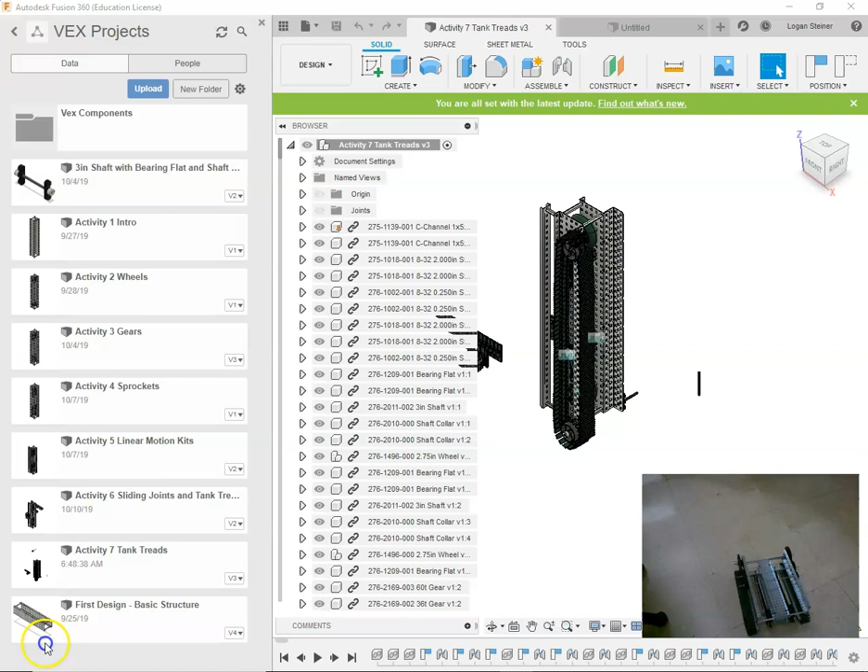Today we're going to actually be giving you your final project for the marking period. As you can see on the screen here, this is half of Activity 7, the tank treads, which we did everything in the VEX kits up to this point. Activity 7, there's 7 different activities. I taught you each a little bit of the components, so now you're ready to tackle your own project.

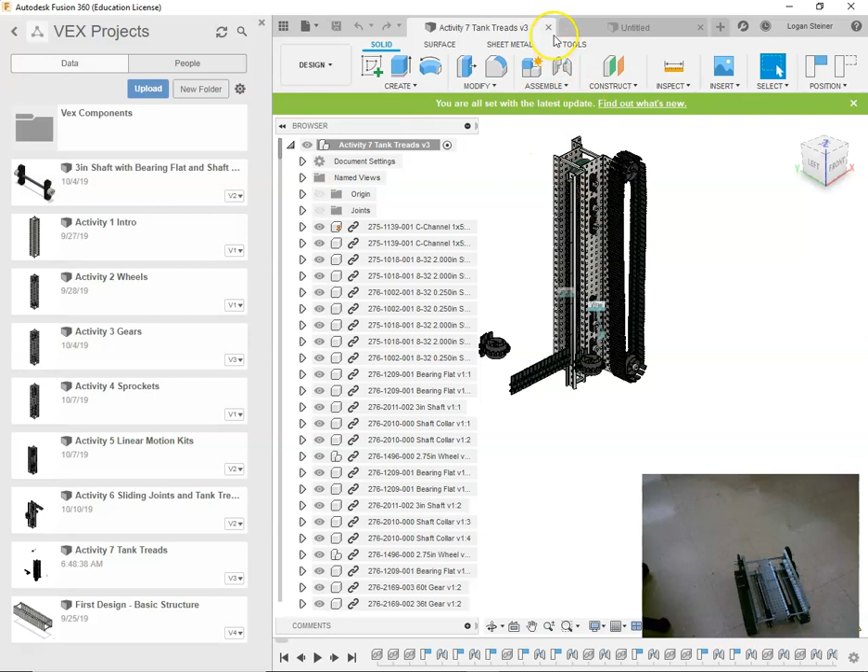Instead of me going through and giving you a video tutorial about it, I'm going to close out of my Activity 7, don't need it. Now I'm going to make sure I'm in my VEX projects folder in Fusion 360, next to my VEX components, not inside of my VEX components. I'm going to push save on my untitled document. I'm going to save this as VEX final project, just like this, in my VEX projects. I'm going to push save.

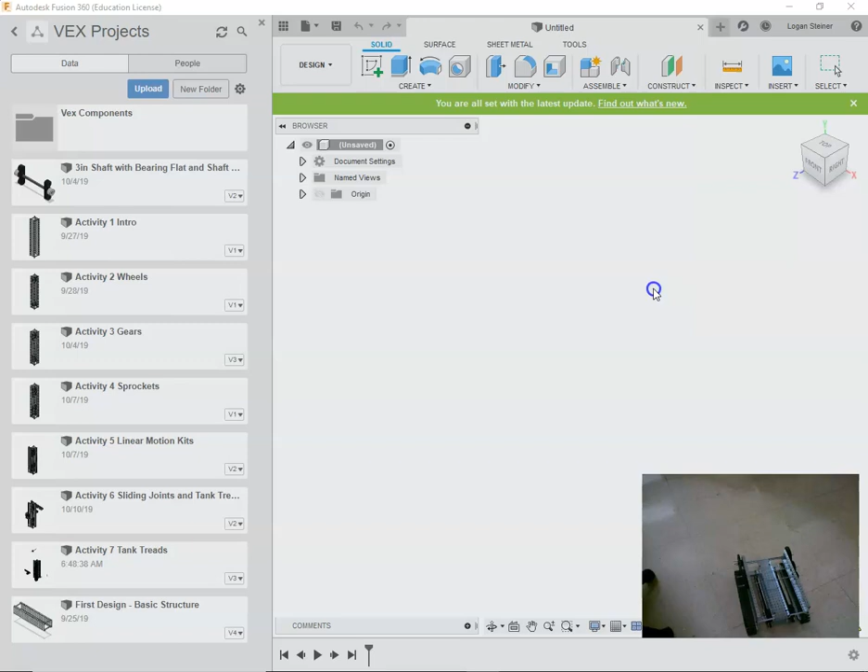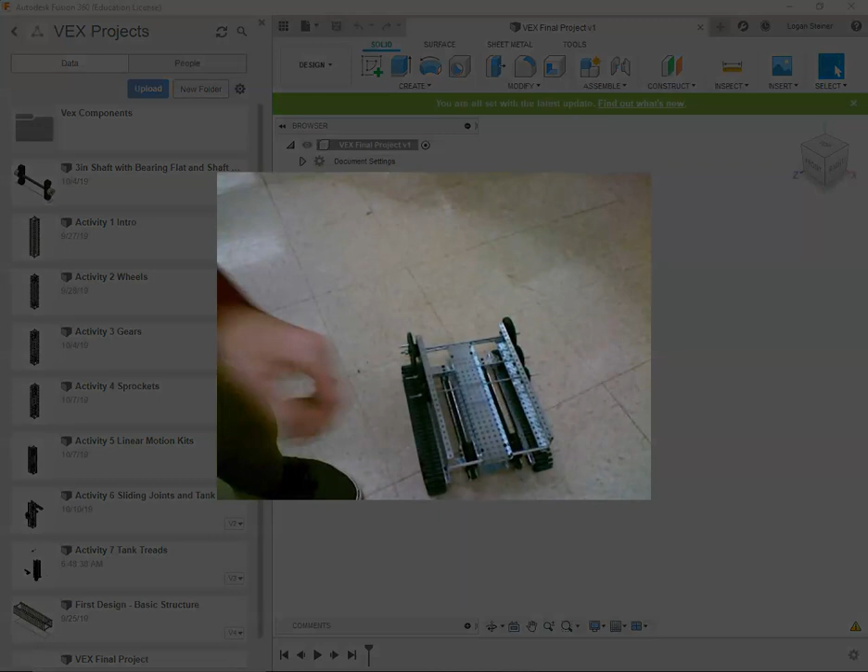Now you're going to be asking, what is this thing down here, what is this window? Well, that's me. Hello. And I'm going to show you guys your final project. So you get to build this beautiful piece of machinery on Fusion 360. I'm going to show you step by step what each thing is, and help you out with identifying parts and pieces.

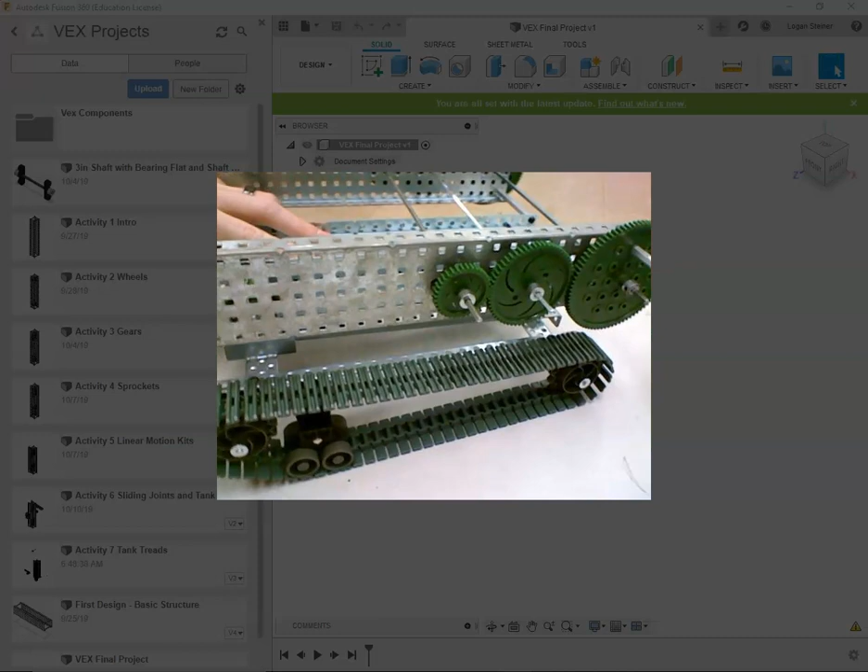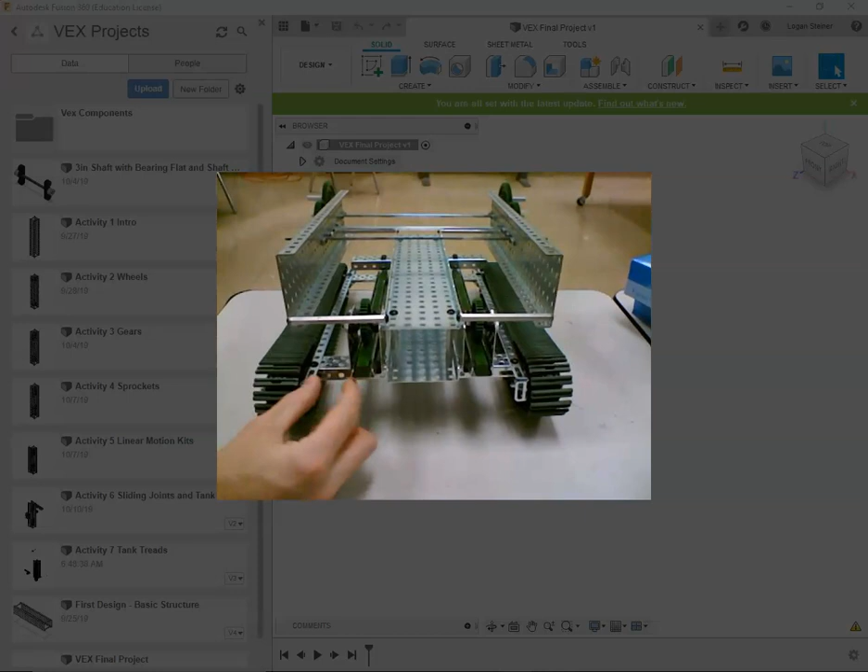As you can see, this vehicle is 100% symmetrical, except for the fact that these rails down here have 2 open spots over here when there's only 1 open spot over here. So it's a little slightly uneven. You got a bigger gap over here than over here, because it's not an even number of spaces. It was an odd number of spaces, so I couldn't quite find the middle point to screw these onto.

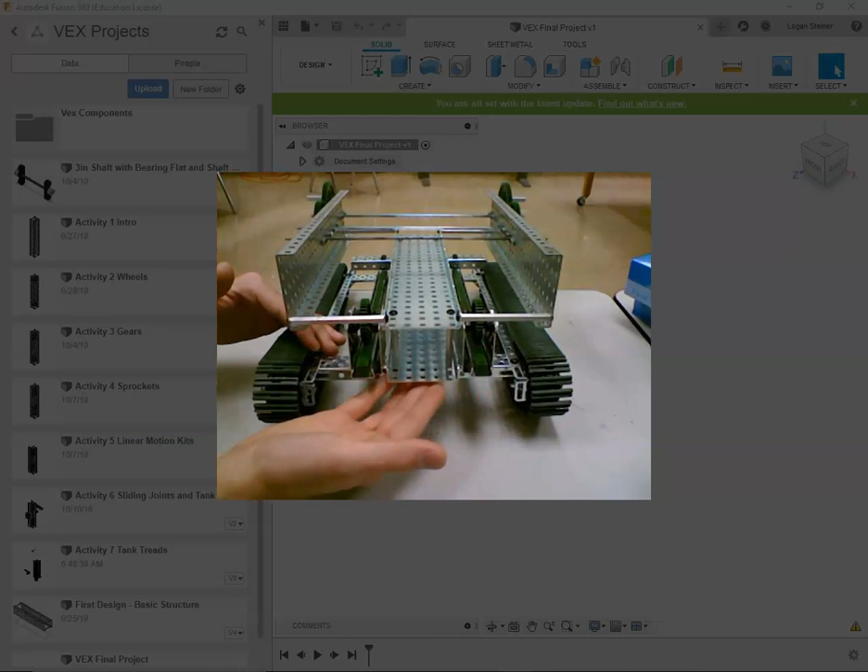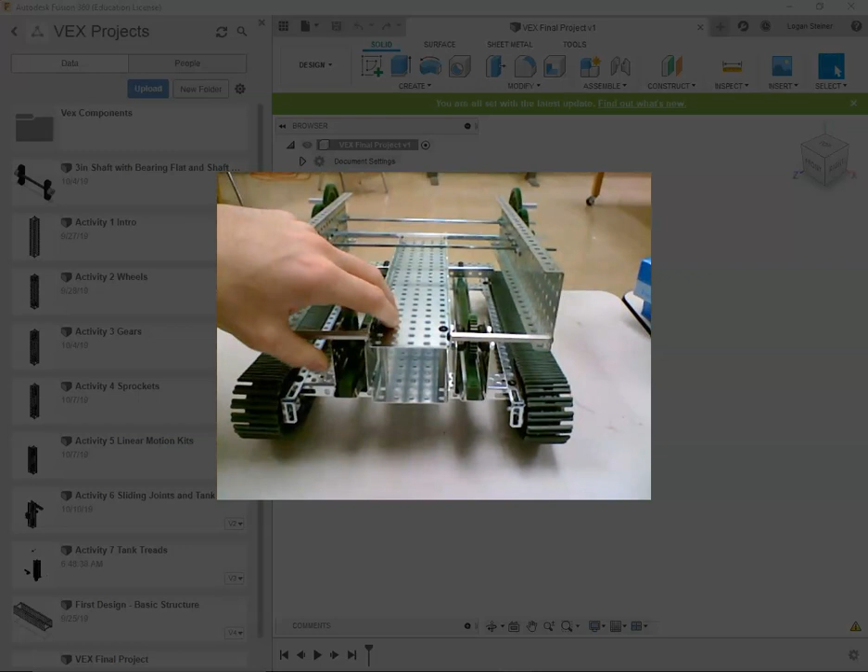So going over each and every little component, first off we have our standoffs. These are 2.5-inch standoffs, you have 1, 2, 3, 4 of those. On the inside down here, these standoffs are, I think, 1.5-inch standoffs. Again, where I'm getting all these files from, it's over here, you've got to go over there. One sec, let me go.

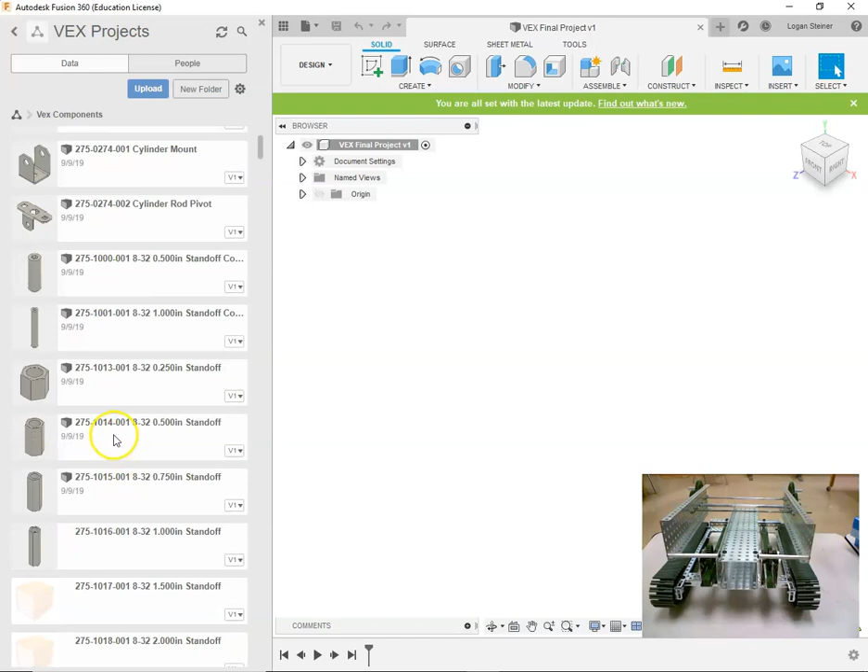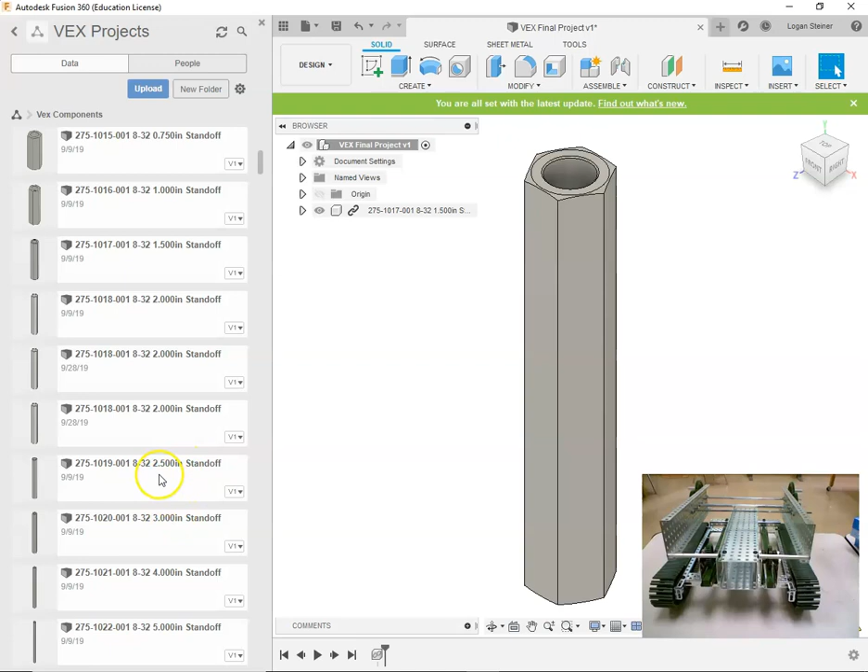VEX components. So once it's saved, I'm going to start off by dragging some components over. I know I have a 1.5-inch standoff, where is that at? 1-inch, 1.5-inch standoff, I have 4 of those. I have 2.5-inch standoffs here. I'm going to drag that away from that one just a little bit, so I can see the 2 different parts.

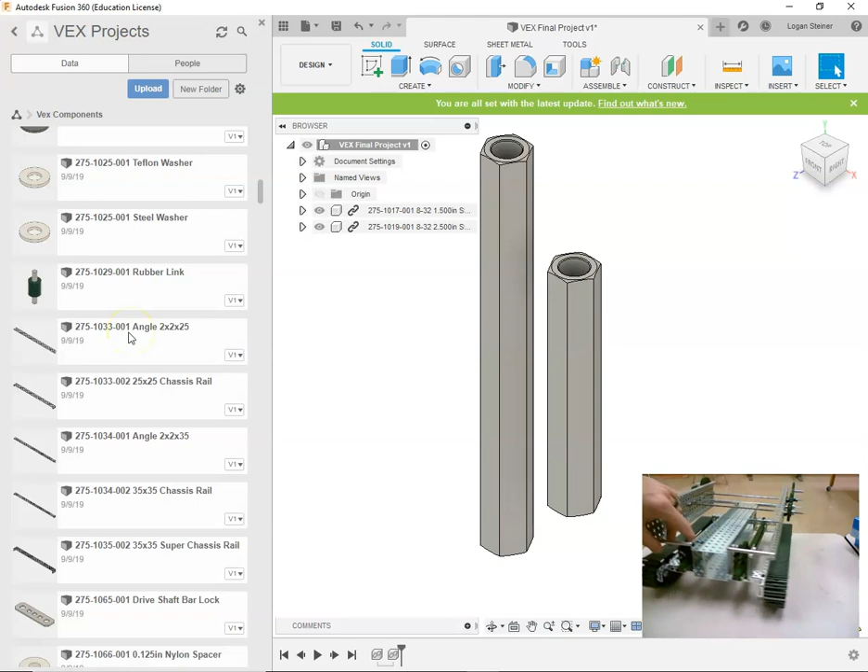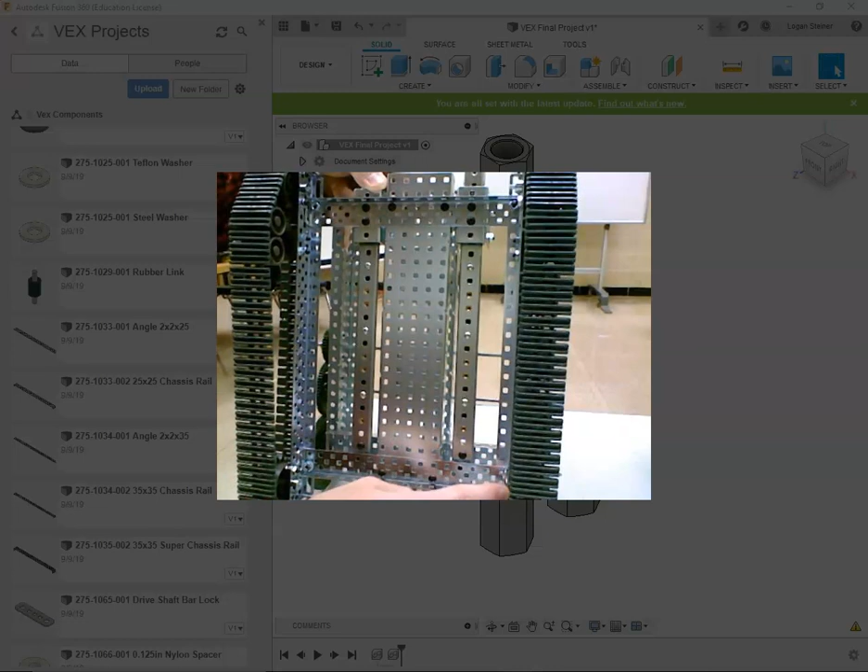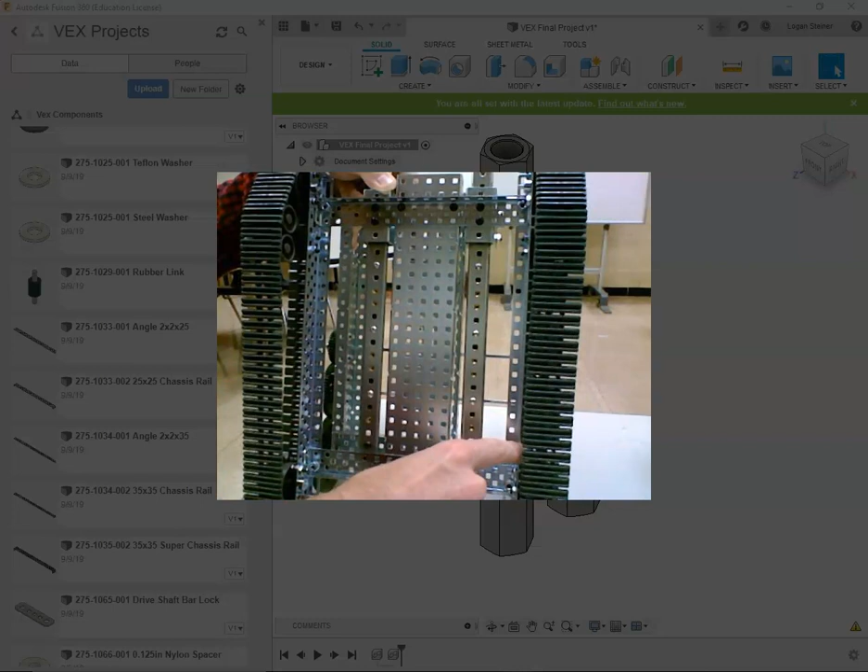So we have rack bars and a bunch of other stuff. Let's scroll through the list real quick to see what we've got here. Angle 2x25, I think we do have that. Yes, we do, because these metal pieces underneath, that's what this is - the long metal strip over here, that's angle by 25. You can tell because it has 1 through 25 holes, so 25 holes means angle 25.

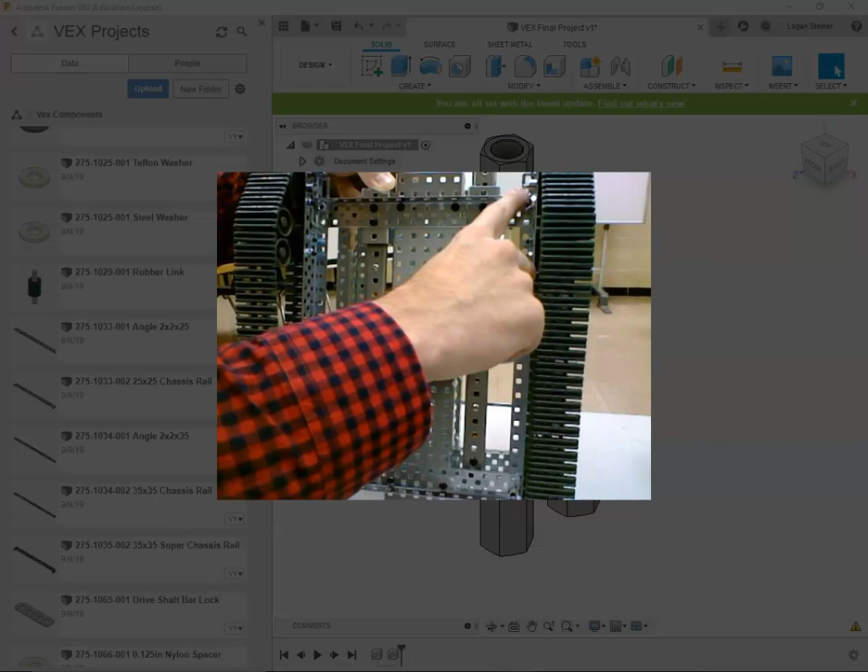Same thing with this one over here, these are 16, I'm pretty sure. So your whole, let's see, 1 through 16 - those are angle 16s. Then you have your longer linear things, I think those are the longer ones. Yeah, I think those are the long ones.

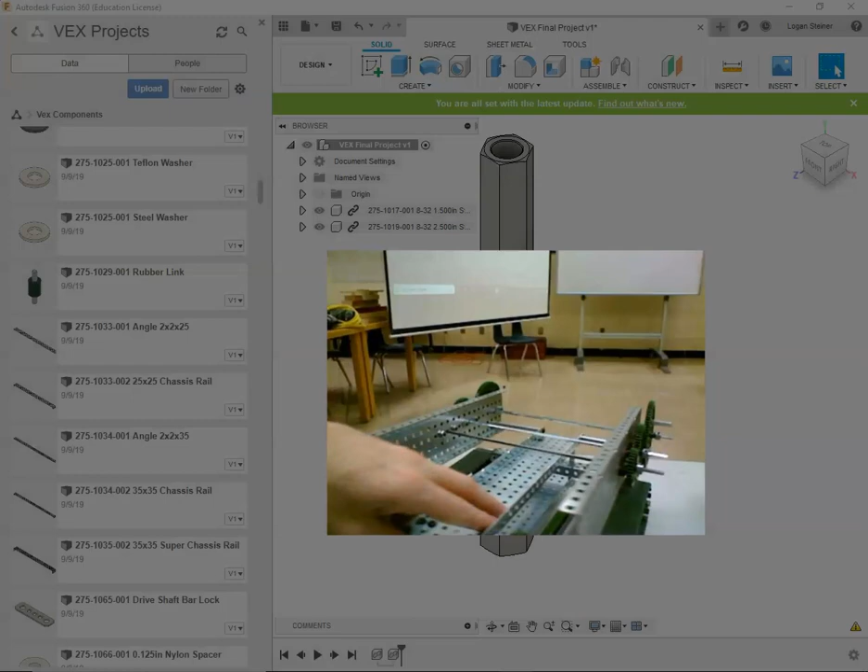And then, just like the linear motion kits that we did in our activities, this piece here is again a 25, C channel 25. I'm going to start pulling some of these out so you guys can catch up and follow with me. So you've got 25s.

So by 25s, and if it helps, you can always count the holes just to make sure you're using the right piece. I'm going to hit OK, move that over. I'm going to have 2 of those. Yeah, 2 of those, for the C channel 25s, let's see if I can find those.

Let's see if I can find a rail or angle that's 16. That's a 35. Let's see, C by 25, anybody? Don't see that, but I do see part. Nope, not those, don't need those.

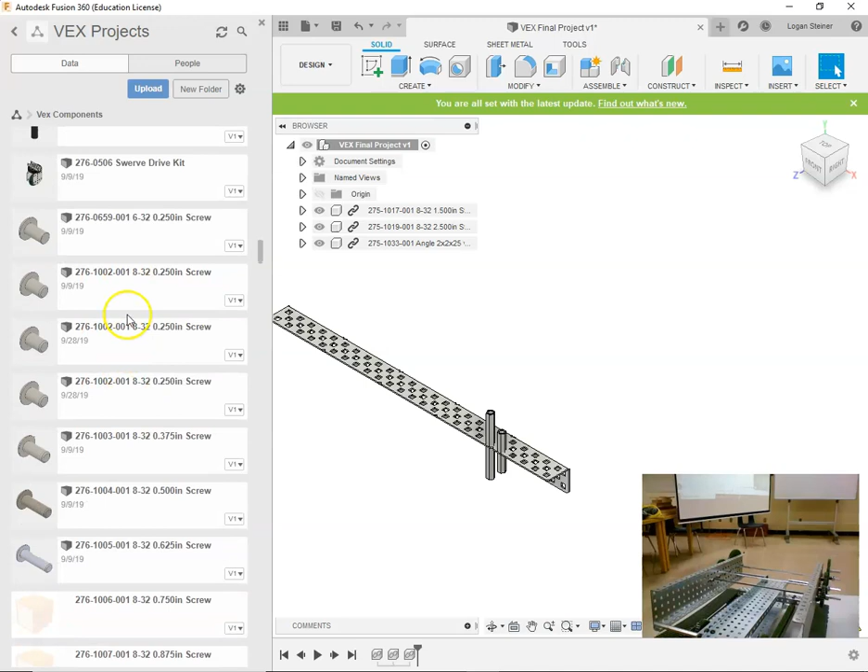Don't need those, those are screws. Bearing flats, you will need a bearing flat, obviously, because you've got lots of bearing flats on these guys. Hit OK. We've got no wheels. No wheels, we don't have intake rollers or anything either.

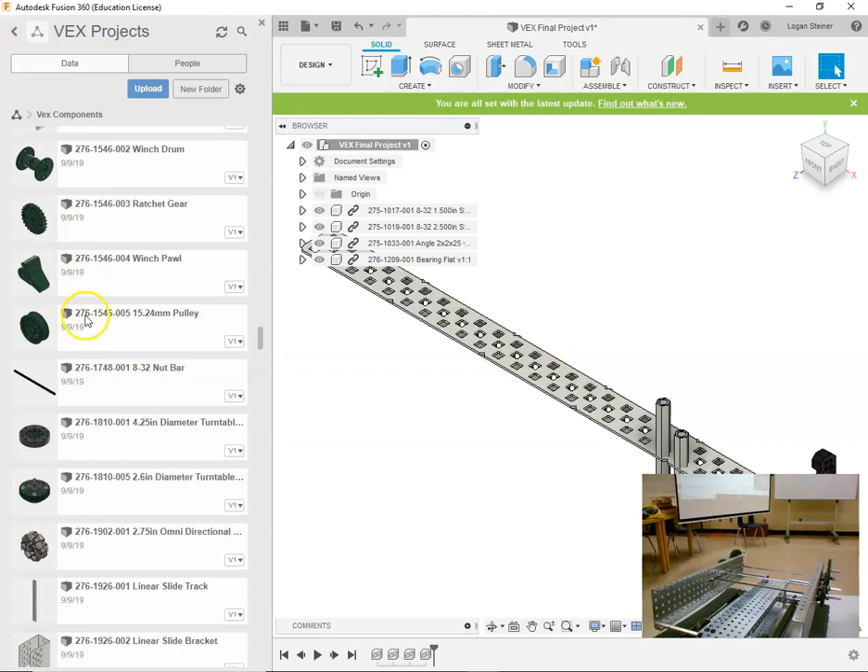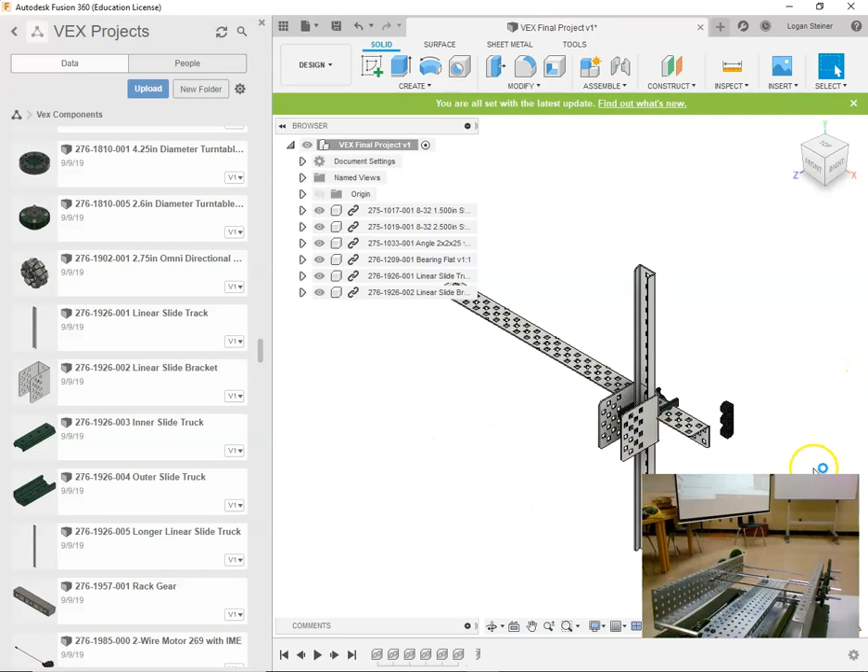Don't need any of these winch and pulley kits. We do need these, so these are important. So you have one of these. One of these. Well, not one, but two, because it's symmetrical again. And then one of these. And a bunch of these.

Is it the short one or is it the longer one? Thinking about this now, I think it might be this one instead of the longer one, because this is the frame.

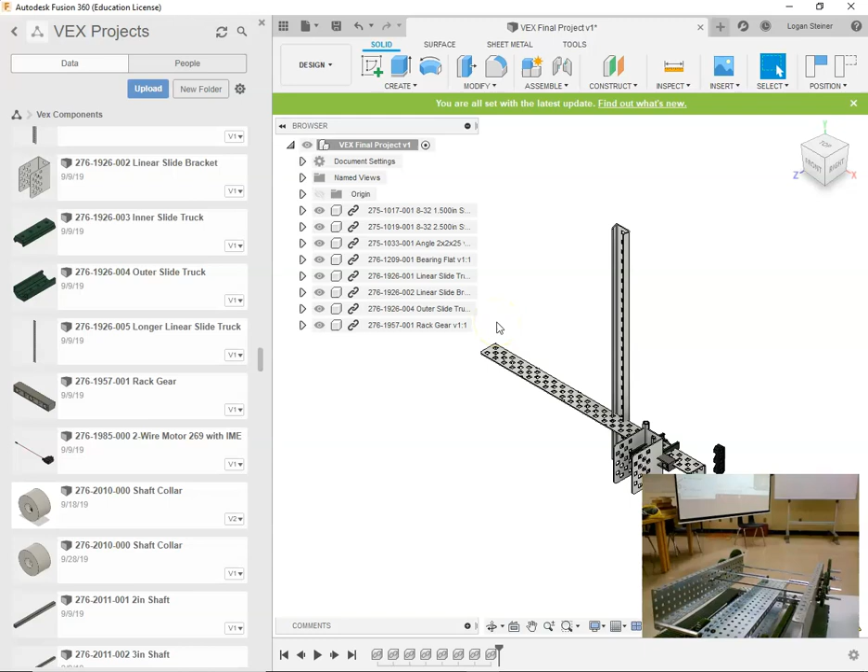Alright, and let's see, we have some shaft collars, need a bunch of those, those are going to be important. We do have a 2-inch shaft. Those are for your linear motion kit gears and for the tanks, so you're going to need a lot of those.

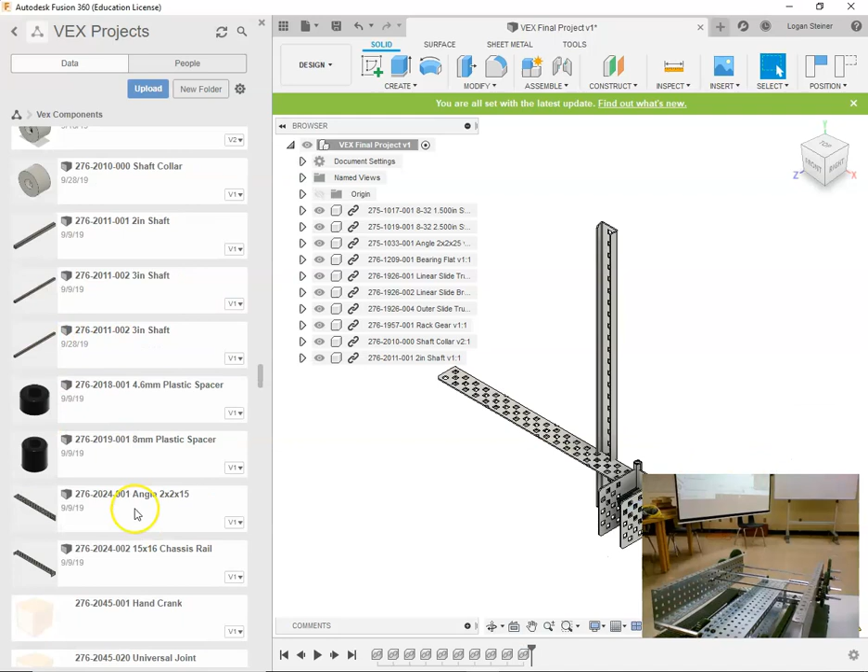I don't think we use any of the spacers. We do have angle 16 rail, so there it is, the 15-16 chassis rail. So that's what that one looks like. Those are the horizontal ones.

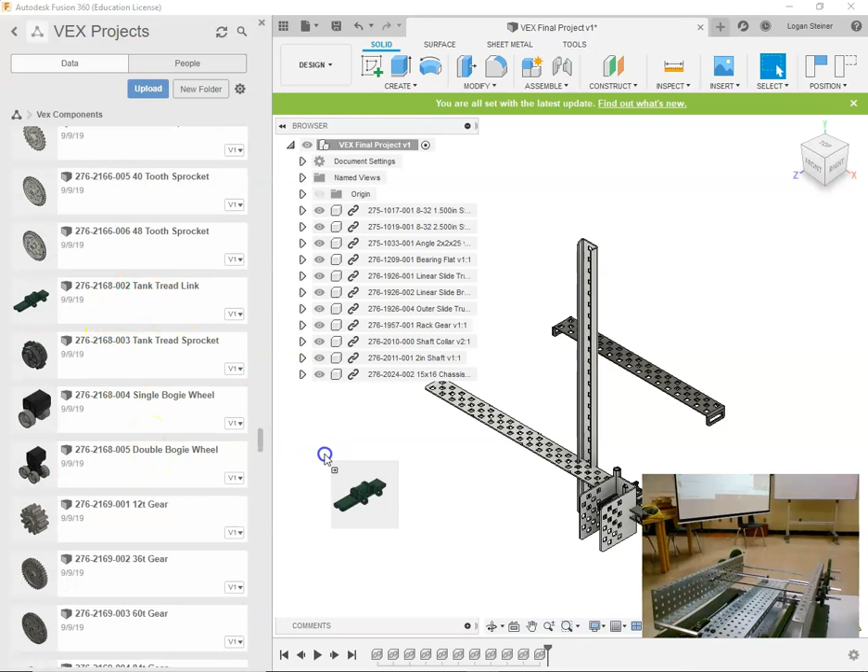Let's see, we have a bunch of tank treads. Oh my god, good luck with that. So we got a bunch of those guys. Got 4 of these. We got 2 of these double bogie wheels. These are for the tank treads to kind of follow along.

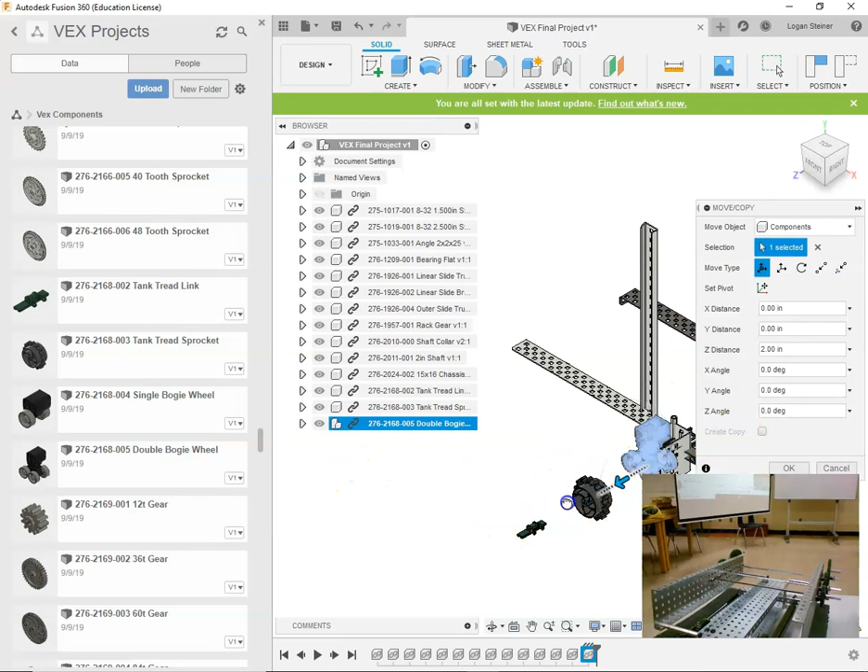We got a couple of these, I think 4 of these. And 2 of these. Two of these.

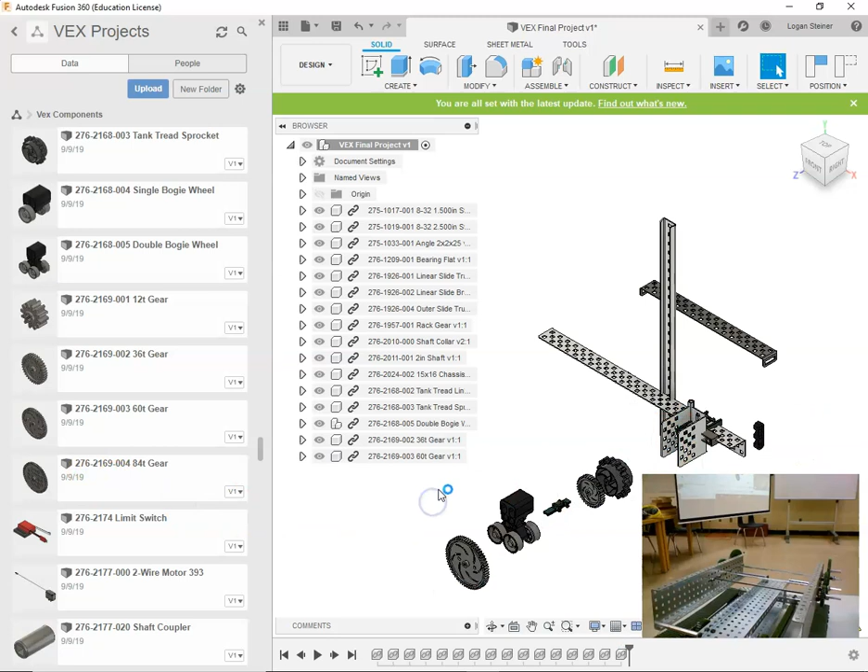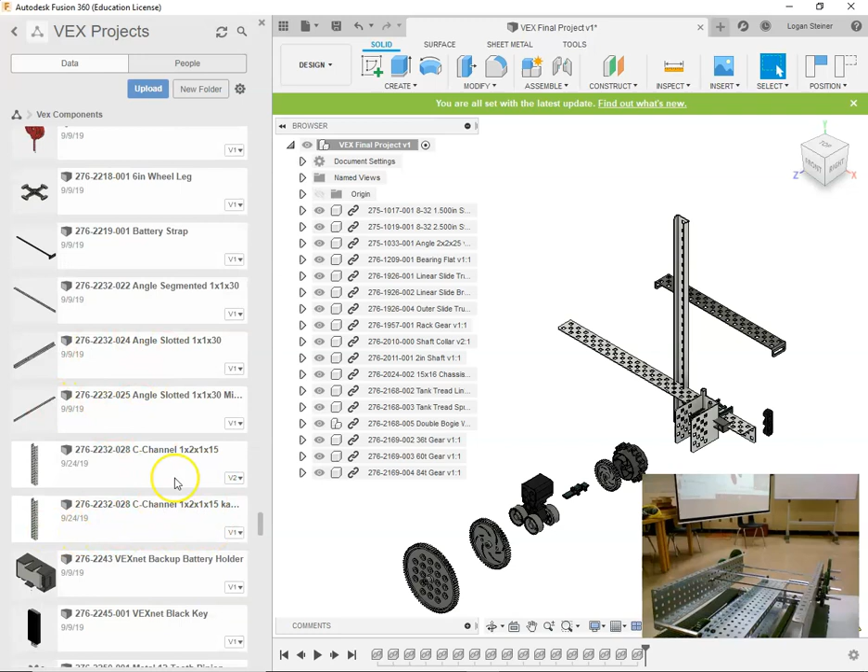Let me think. Anything looking out of the ordinary here? Do I need anything else? I see C channel 15 down here now, but I don't know where the C channel 25s are. We'll just keep going. No sprockets. You're welcome.

Okay, so these are aluminum chassis. That says 20. Do I have one of those on there? I don't think I do. Actually, I do, yeah, I do have a 20.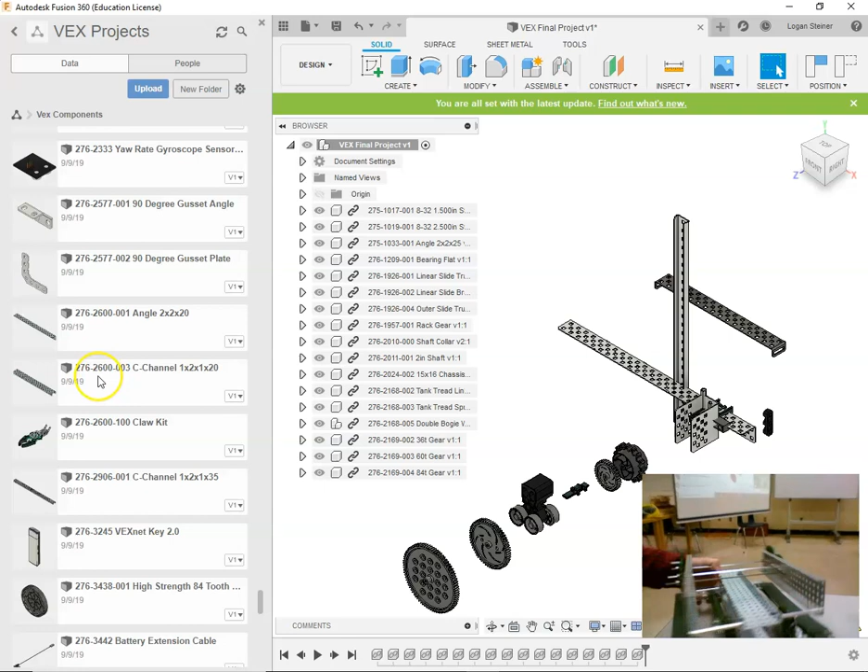Yeah, so let's just bring this up. So I think it is a 20. Let's see, 5, 10, no, it's a 15. Mine's a 15, C channel 15.

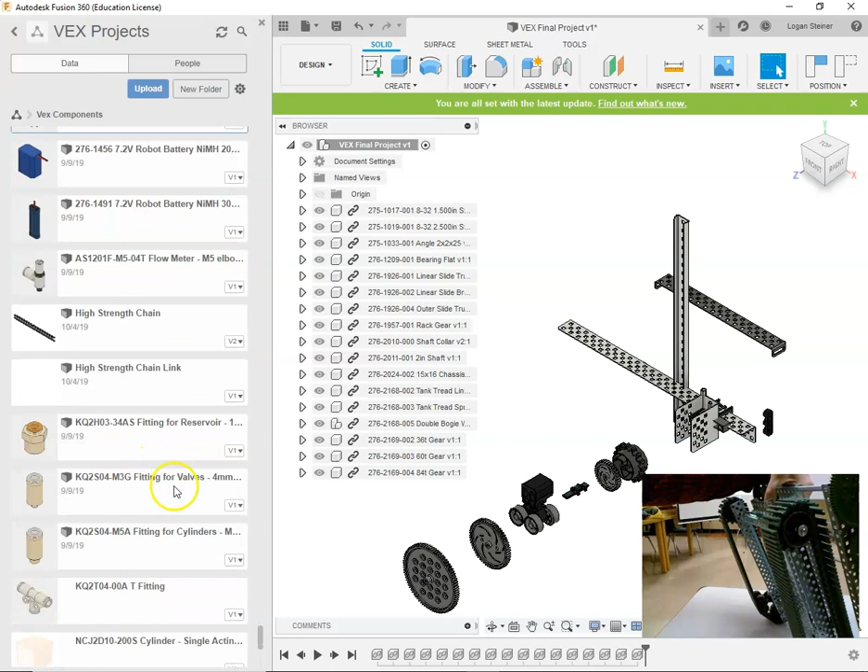Let me see if I can rename just to see what it is. Nope, that's not it. Alright, so I'm going to have to search some stuff up here. I need a 15. No, that's a C, okay, so let me do C channel.

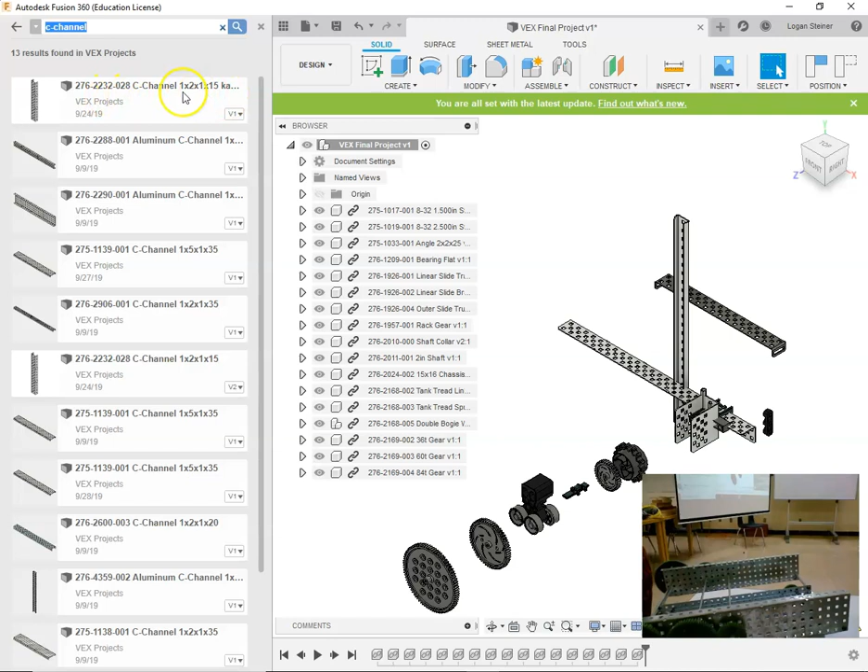There it is, boom, that's the one we're looking for. And just like that. And then what else do we need? Yeah.

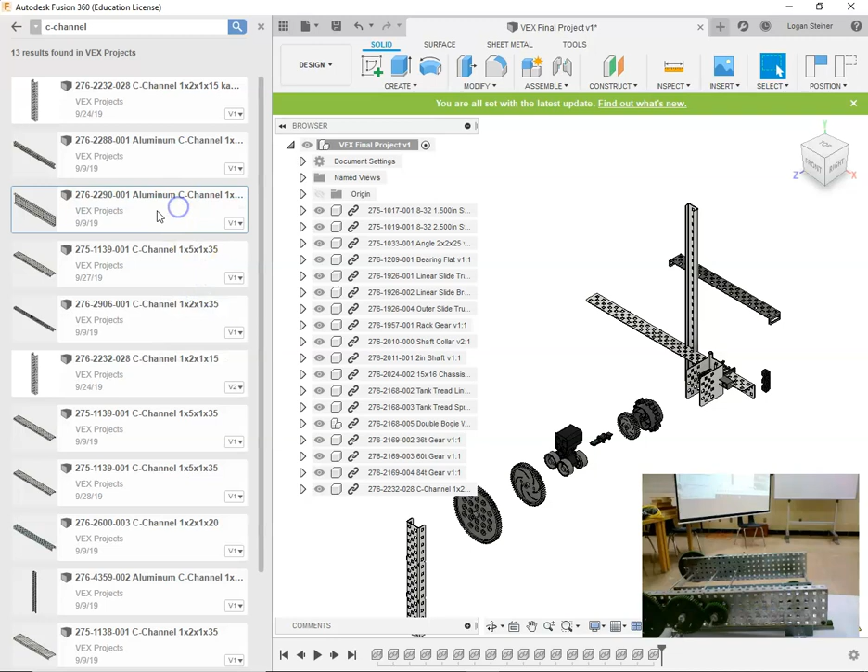C channel by 25s, right? Let's see. There you go, you can use this guy. Boom, that's pretty much all the components that I can think of right now.

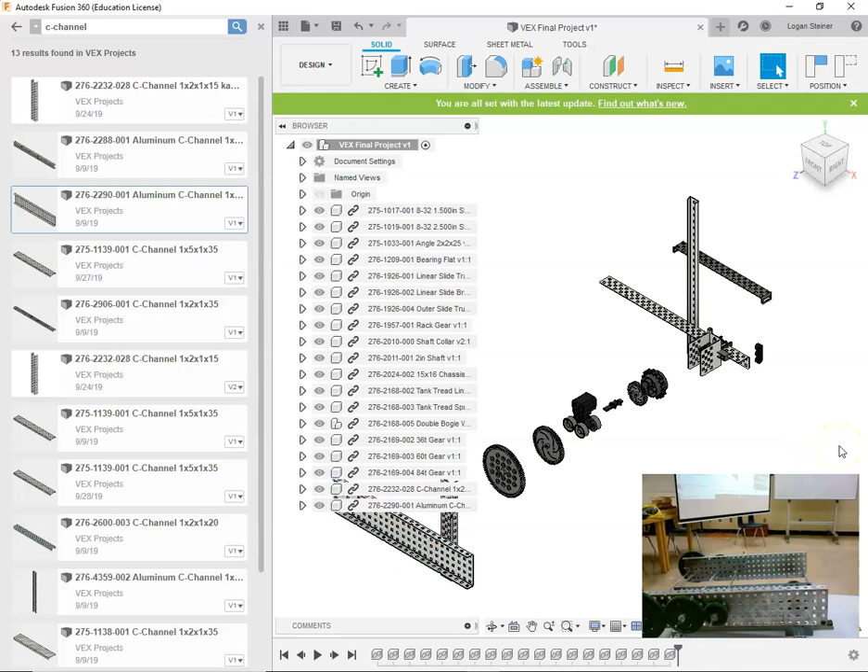Other than, I think you need 1-inch standoffs, because I forgot about the ones on the ends over here. These little guys, alright, so these are all your components for the most part. Let me see if I can scroll up to get those last little standoffs here. So I have a 1-inch standoff on the end, or outside. Yeah, I think it's 1 inch.

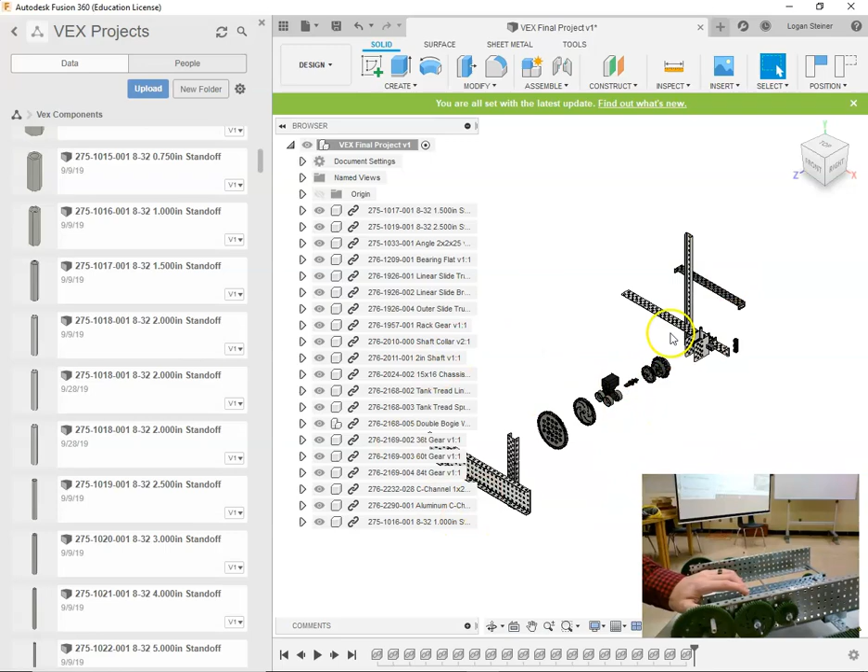And boom, alright, so then you just combine all these pieces, copy, paste what you need, what you don't need. So I'm going to take you guys into a deeper look into this machine here.

So, we'll start on the top and work our way down. So on the top rail up here, we have, this is our 5, 10, 15, 20, 25.

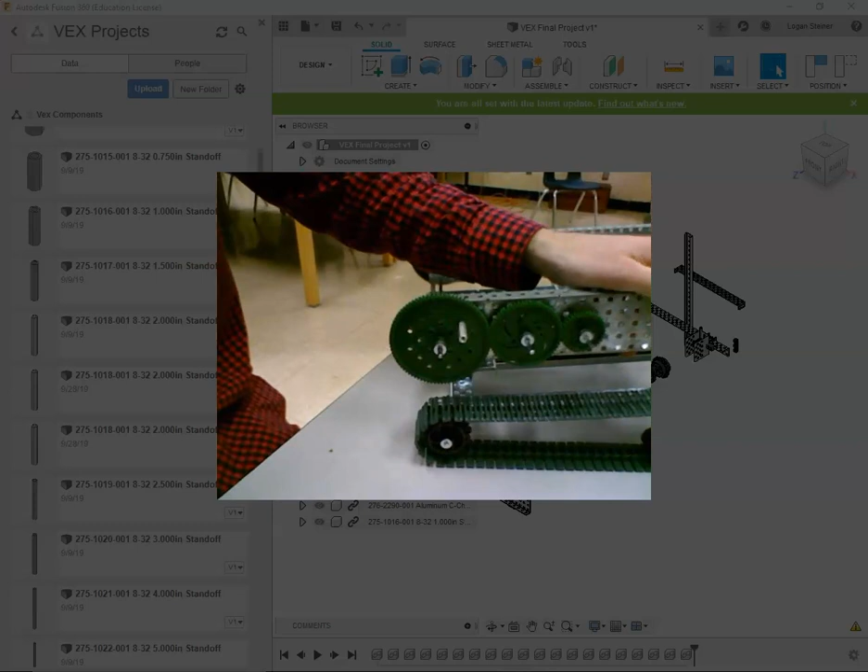There we go. This is our 5, 10, 15, 20, 25 C channel.

It's symmetrical on both sides. In the middle, two holes in from the middle, that's where our first shaft goes. The shaft is 12 inches. It's a 12-inch shaft, 12-inch shaft, 12-inch shaft.

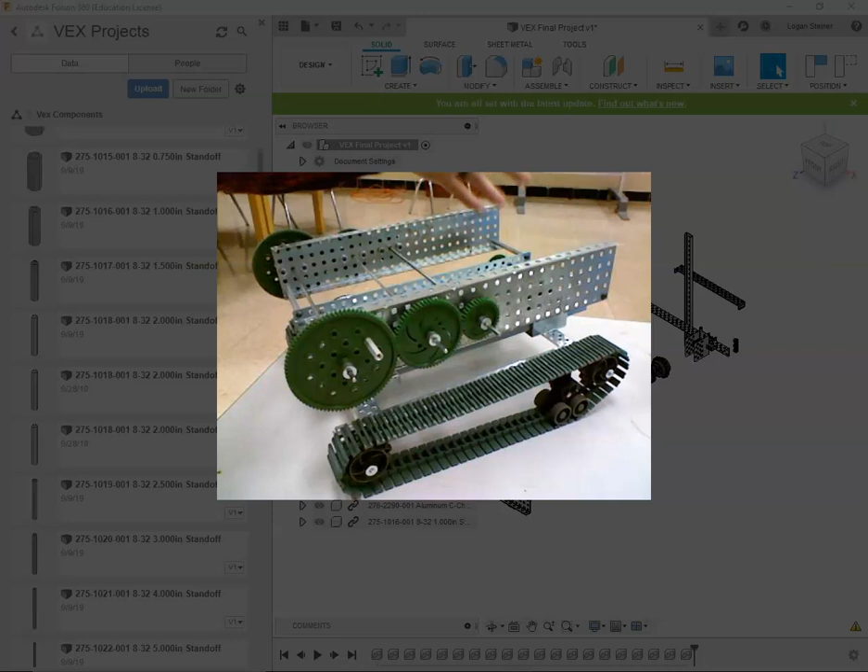So then it goes from the inside out. There's a bearing flat for each of these little guys. So bearing flat here, bearing flat there, bearing flat there. And each one has their own gear.

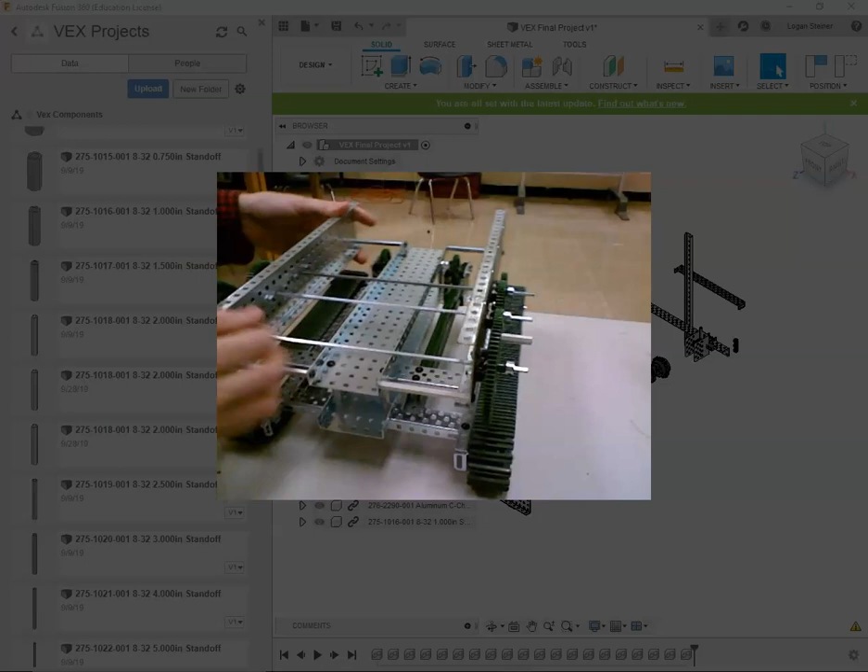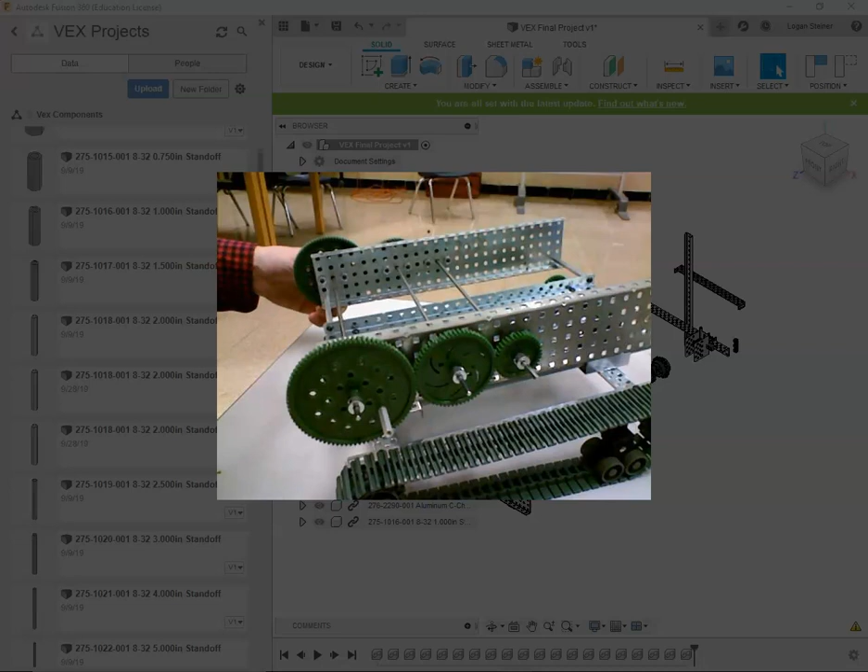And I put the screws on there. I won't make it necessary to have those screws in there. If you want extra credit, you can put those in there. But for the most part, I want a motion link between all of these gears. This is an 84-tooth gear, 60-tooth gear, and a 36-tooth gear.

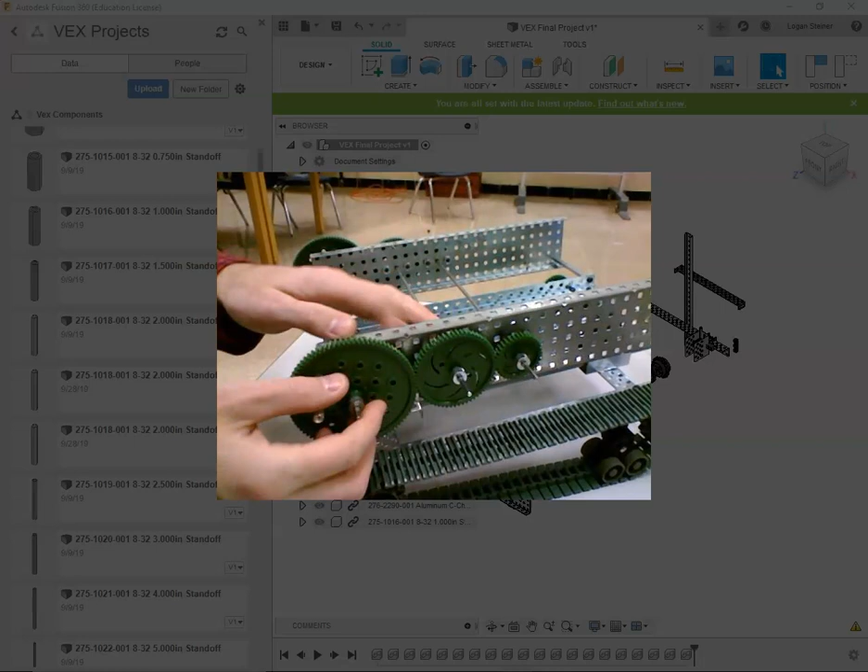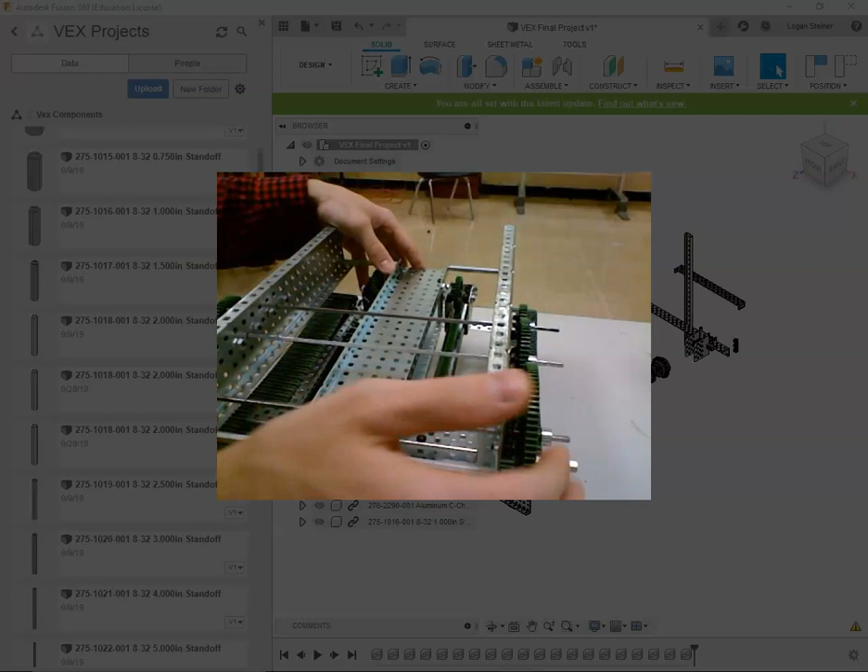On the ends are the shaft collars. As you can see, we got a little bit of a space leaving out. Now, I'm not giving you exact specifications for how long or how far out or in the gears are. So this little distance here, you want to kind of eyeball it to make sure that it looks like this little distance out here. I didn't measure it.

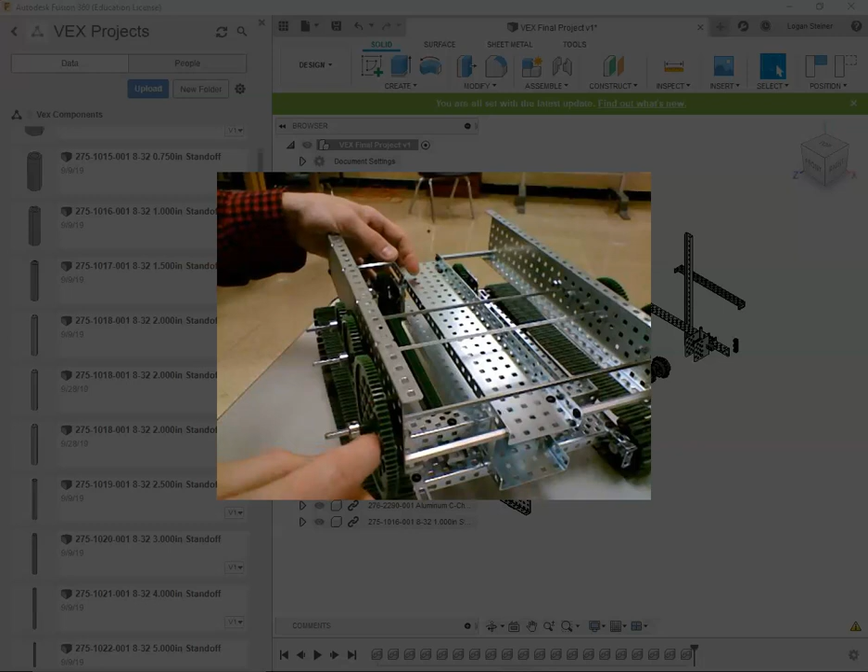This is about a 1-inch standoff. So I take this and screw it into the back side. There's a screw here, and the standoff comes out the other side. This standoff should be rigid on here.

So you have revolute joints for all your shafts, rigid on everything else onto that shaft, and you rotate. This should rotate one way, this should rotate the other way, this should rotate the same way as this one. These two rotate in the same direction, this rotates in the opposite direction.

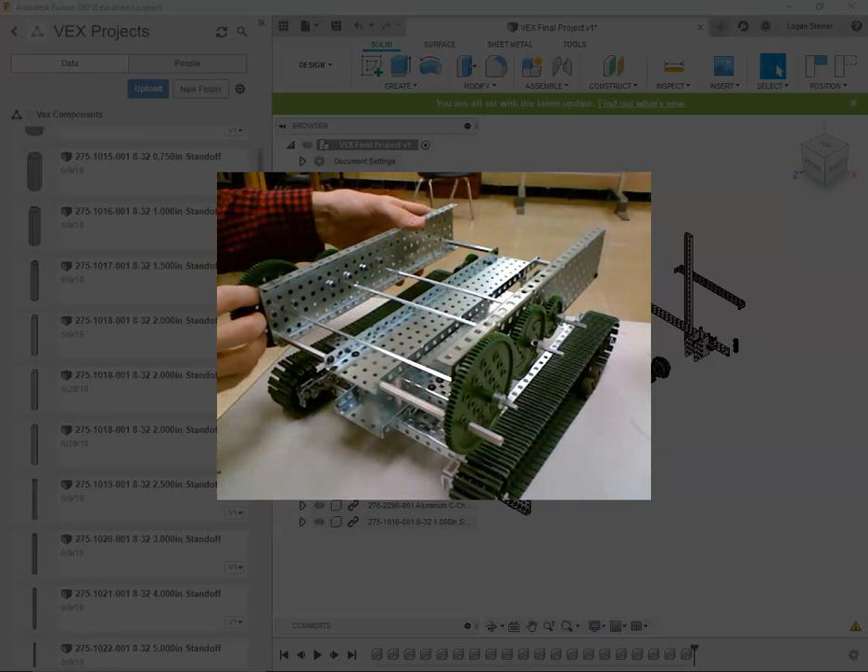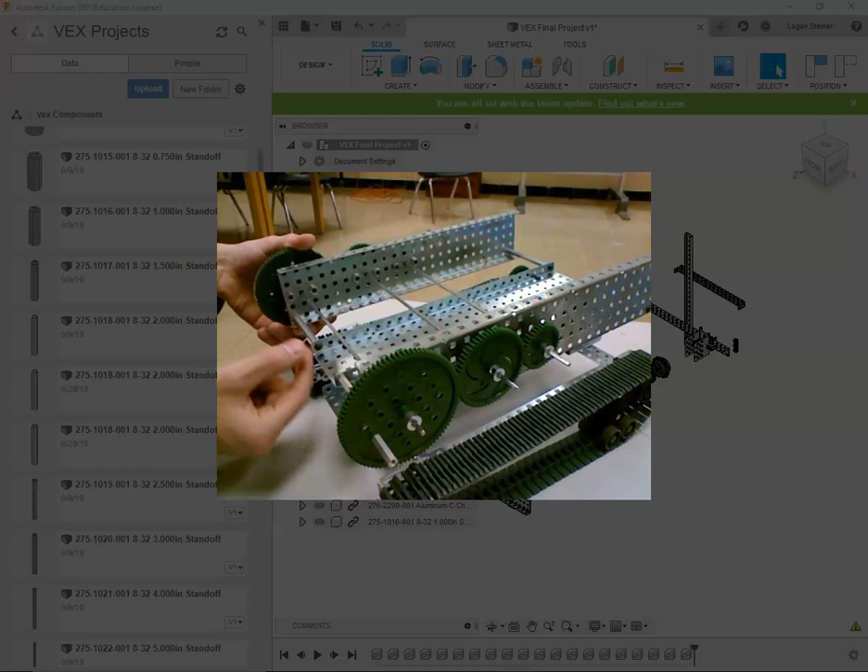So that's the top. This is a C channel 25. On the bottom holes, I have the C channel 25s with the 2.5-inch standoffs coming out to connect onto these two C channels. So this is standoff 25, or 2.5-inch standoff. Just boom, you're good to go.

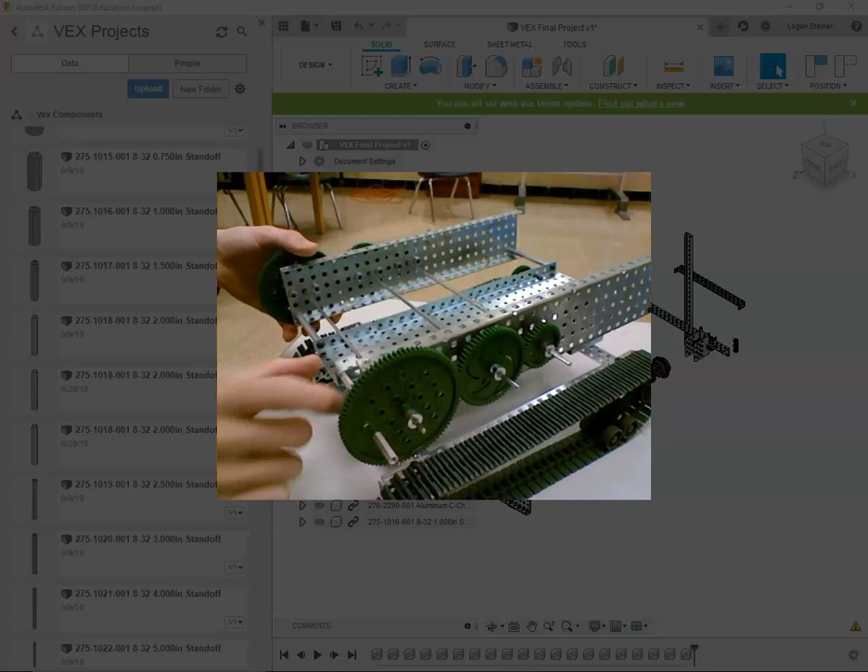And then same thing with up here. So the top one to the top or bottom inside one up there, and it's symmetrical. So everything that you do on one side, you want to do on the other side. And then from the top point here, you want to go down to this bottom point.

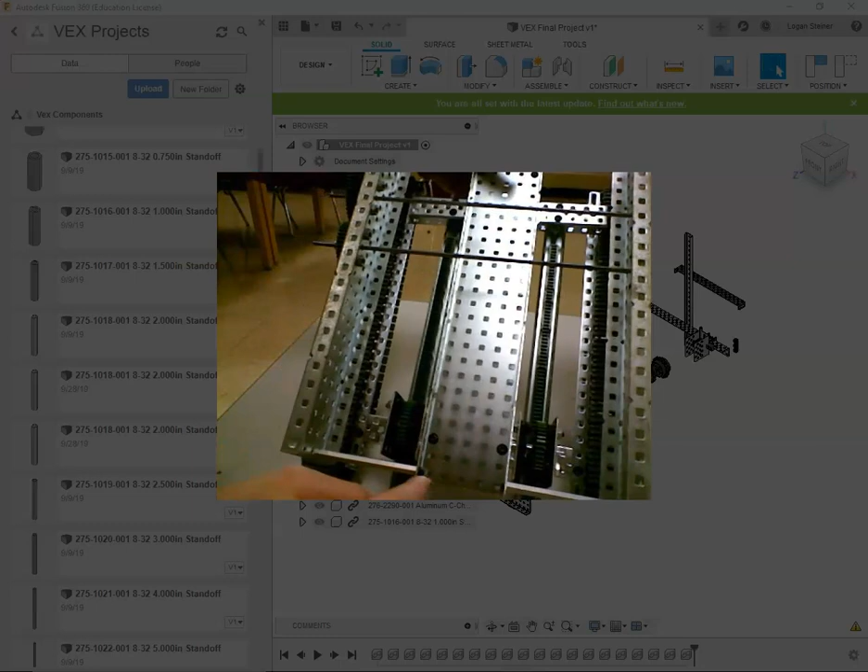These are 1.5-inch standoffs. That's what these are, 1.5-inch standoffs, and those are located in these spots. So 1, 2, 3 on the third one, 1, 2, 3, and 1, 2, 3. I try to keep it as symmetrical as possible.

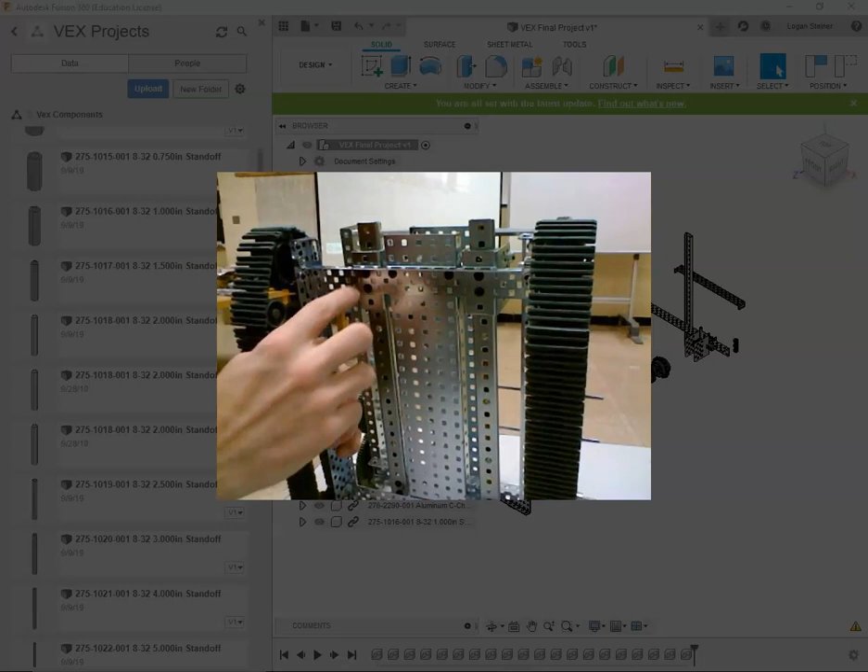Now from there, what you can do is add in these linear motion kits first onto this C channel 25 — or not C channel 25, but what we got here is the rail 16. The rail 16 joins in, so you got 1, 2, 3, 4, 5, 6 on the 7th hole. You screw that into your C channel up here.

Then on the other side, it's 1, 2, 3, 4, 5, 6. So 6 on this side. That's why it's a little bit off. So this side has a little bit bigger gap than this side. Don't let that throw you off.

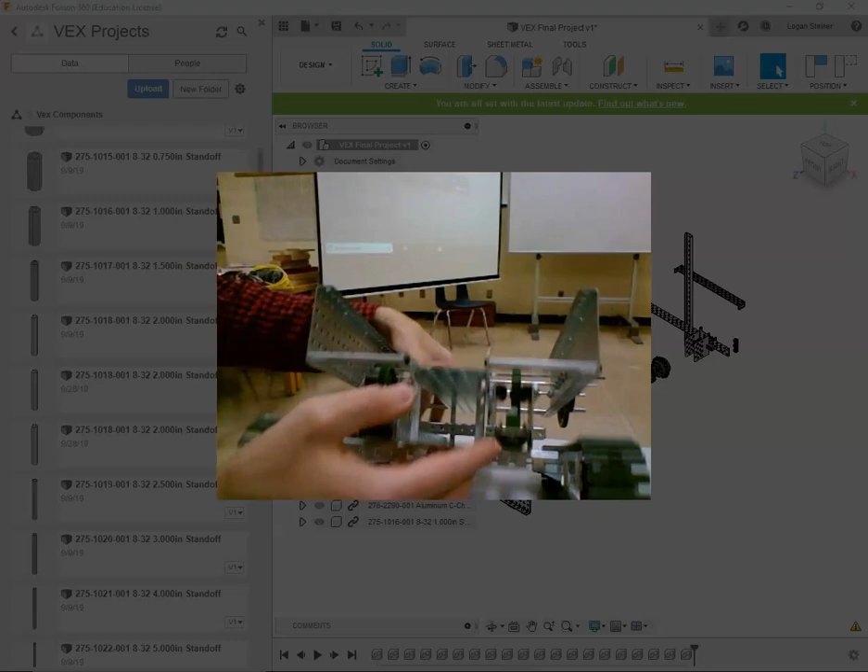Then from there, those linear motion kits that we built in the first example, that's all that these are. In activity 5 and 6, we built the exact same thing. So there's this part — I forget what that's called — but then you have your rack gears with your linear sliders, and your rotational joints for these here.

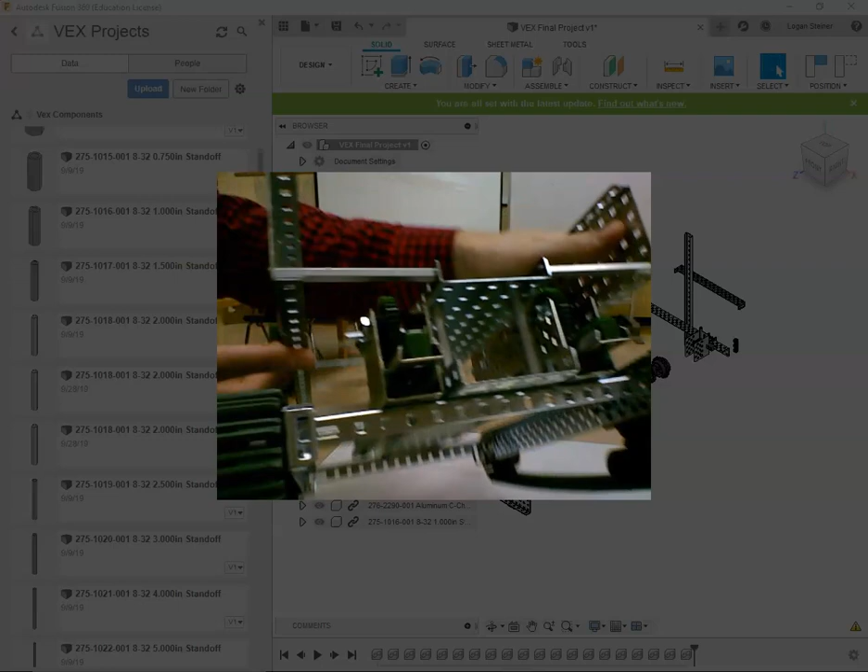These are separate. Notice how these shafts, this set of gears here — that's a 2.2-inch shaft that goes across. It doesn't connect all the way through. So when I pull this one out, they slide together, but that's because I screwed them together over in the back. So if I take a look at the back side over here, again, if you want to pause the video at any time, please feel free to do so.

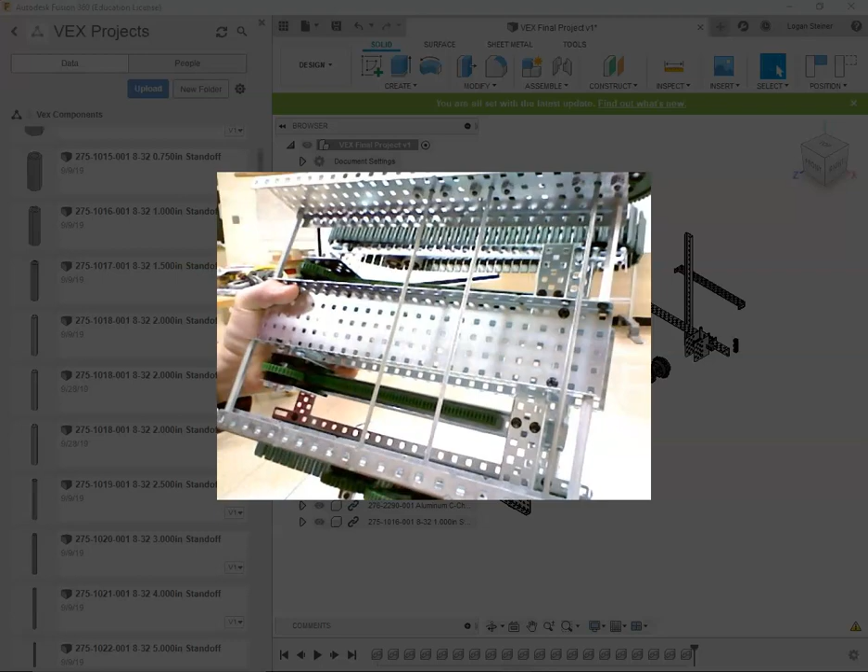What I have over here is the C channel 15 that connects across, and I have 2 screws here that screw into the linear motion kit. Let me drop this down a little bit so you can get a better view.

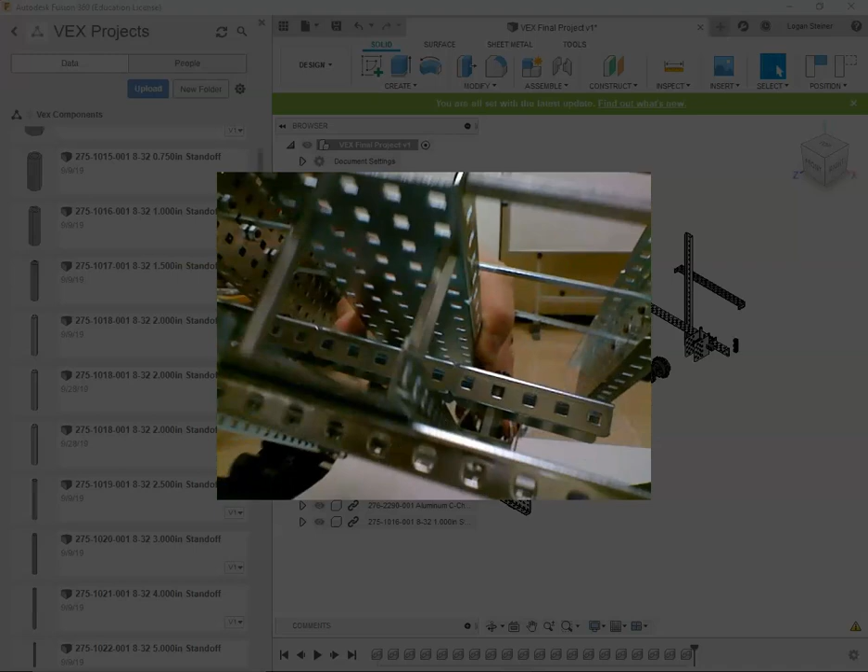It screws into the linear motion kit because there are standoffs. These little standoffs in there are 1-inch standoffs. Let me rotate that for you. See how those are screwed in there? And those are not the very last 2, but you skip - you skip 1, and then 2, 2, and go from there.

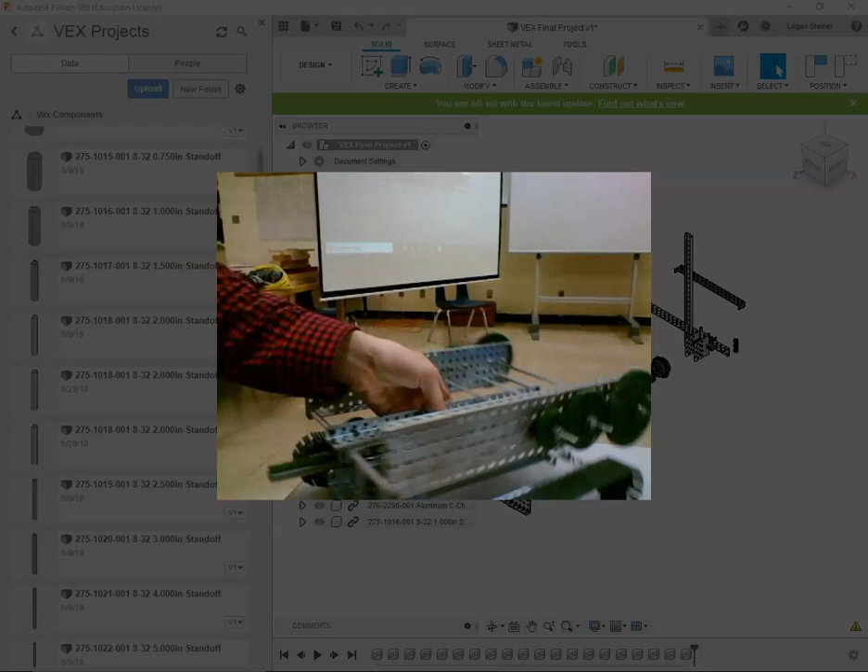If you can find a way to use your old linear motion kits from the older example activity, feel free to do so. They're super symmetrical, rigid joints, and as this rotates, this slides out. So as I slide this out, that rotates.

That's a motion link for that. And then, last but not least, connect your 16 rail down here, 16 rail up here, connect that to your 25 rail here, and from the 25 rail on the bottom row you have skip 1, second one, that's a 2-inch shaft with a shaft collar, and then the sprocket, the tank tread sprocket.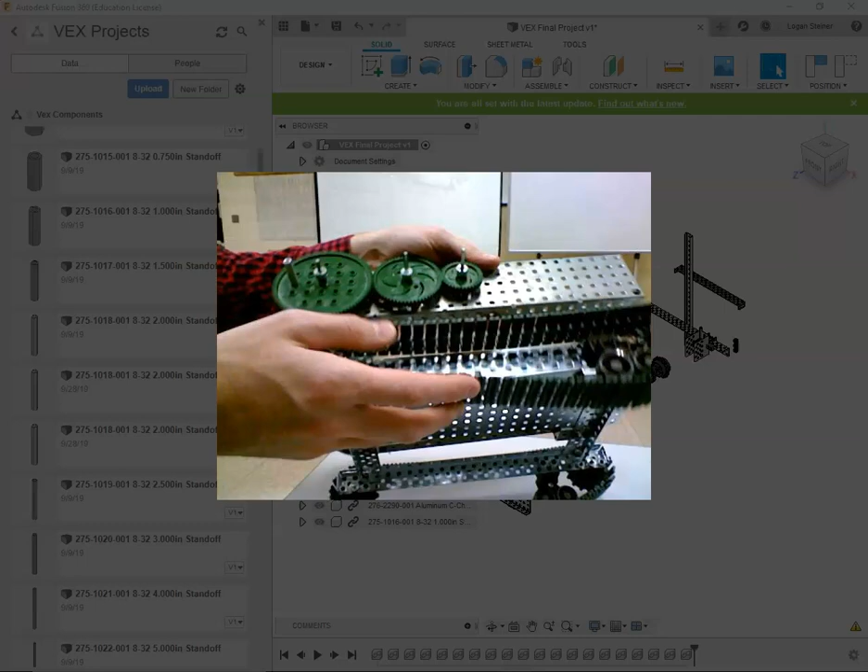Again, you don't have to make these rotate. Like the motion and everything for the tank treads, do not worry about that. That's okay. I'll back this off so you guys can make an estimate on how far or how many tank treads you need.

If you need to pause the video to look at this image, feel free to do so. Just count all those across the top and then see how far you need to go down the bottom. What are these things called?

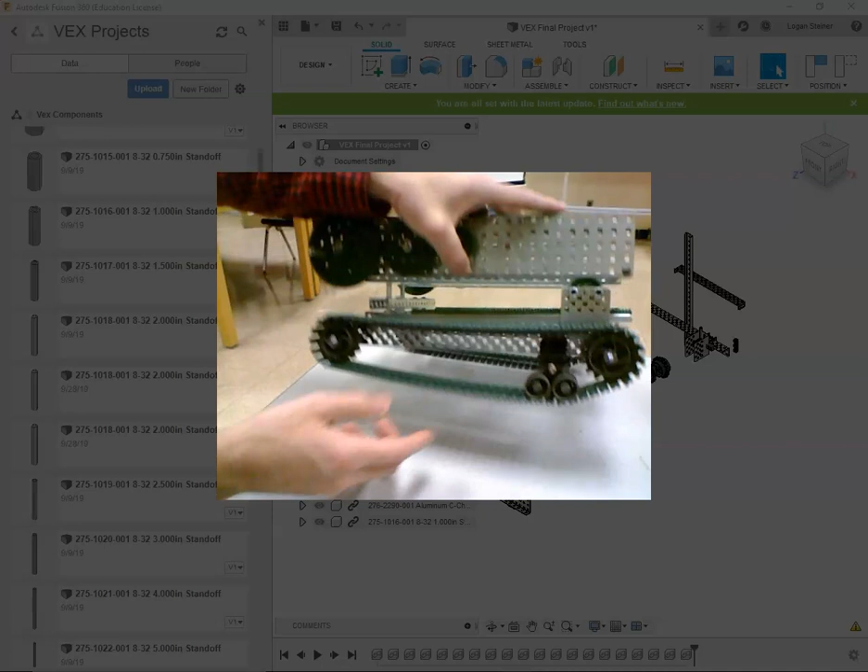The bogey wheels. These ones are located - you have skip, so it's 1, 2, 3, 4, 5, oh shoot - so it's 1, 2, 3, 4, 5, and 6 on the second row. So in the second row, they're not on the bottom row, but in the middle row, there's 5 and 6.

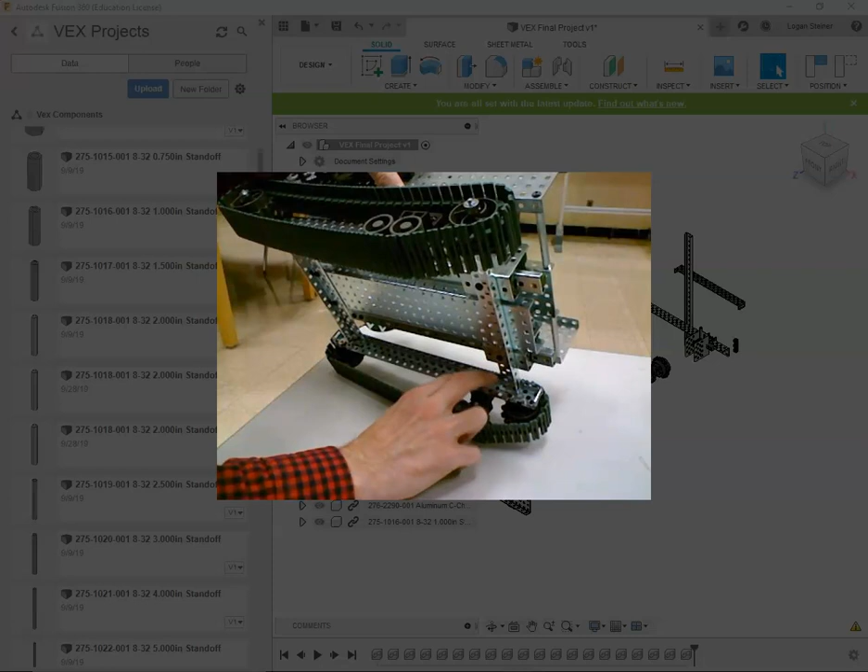Just rigid joint that. These should already be - you want to make that a rigid group. So if these are multiple pieces, which they probably are when you pull them out, rigid group that, and then put it all together.

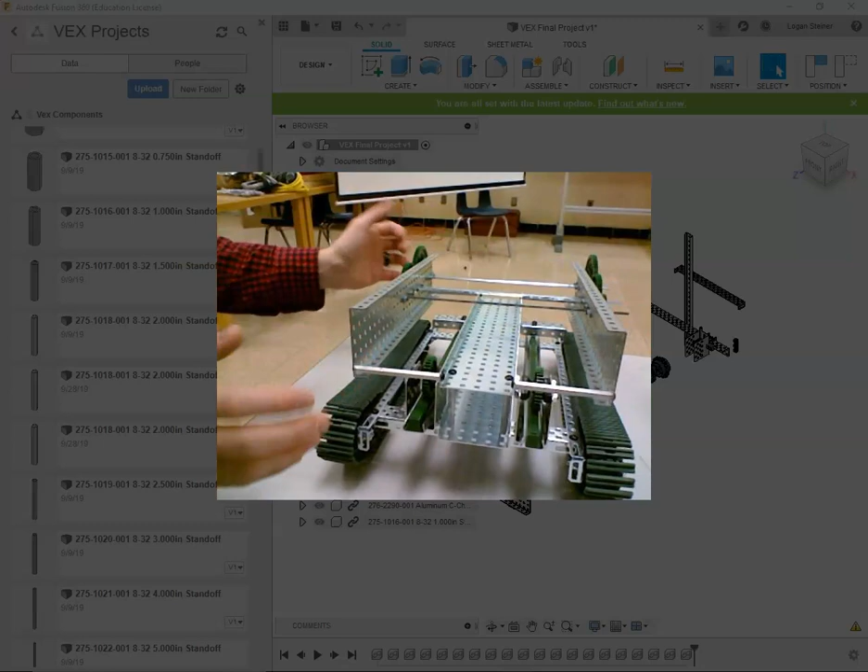So this is it. If you need to pause the video to look at different angles, please feel free to do so. Got lots of stuff going on with this. All right, good luck with this, guys.